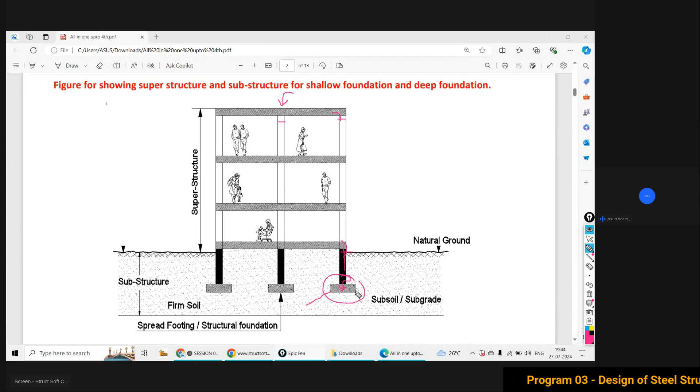This is what we call our foundation, which is responsible for taking the load from the superstructure. But my dear friend, try to understand, this foundation is not actually responsible for carrying the load. It is responsible for transferring the load coming from the superstructure to the subsoil, over which your foundation is going to rest. So overall, your entire structure is not supported by your foundation. Your entire structure is actually supported by your subsoil.

But in our understanding, when we talk about the substructure we consider only the foundation. No, your foundation, the concrete slab that you put here, is ultimately supported by your subsoil. So your foundation and your subsoil are combinedly termed the substructure, the structure which is below the ground. Whatever structure you talk about, whether a bridge, a building, or any other type, it has two parts, superstructure and substructure. And the substructure is not only the foundation, but also includes the subsoil over which your entire structure rests.

Are you getting it? Your foundation slab is just a platform for the superstructure, and the load carried by your foundation is transferred to the subsoil. So ultimately your subsoil should be strong enough for whatever load you apply over it. Your foundation should not be enough alone; your subsoil must also have enough strength to carry the load you put over it through the foundation. So this soil mass should be stiff and firm enough to carry the load coming from the superstructure. But my dear friend, it is not as easy as we are discussing.

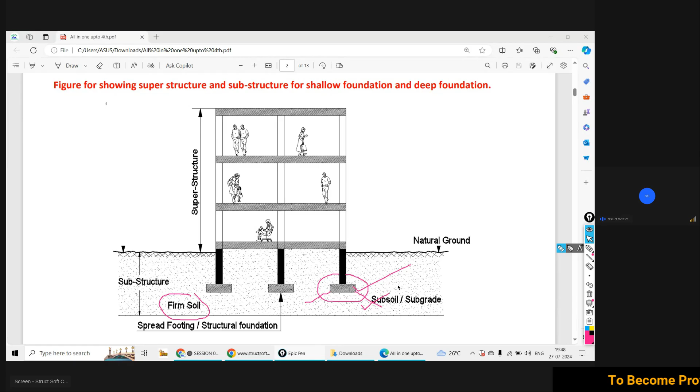It is not that easy, as we are discussing, because there are a lot of challenges associated with finding out the properties of the soil. If you are going to put your entire structure over the soil, you should know its properties - the shear strength capacity, the load carrying capacity. Unless you know the capacity and strength of the soil over which you are going to put your structure, there is a possibility of complete collapse and failure if your soil is not capable of carrying the load you impose.

That's why it is important to investigate a soil, to investigate your proposed land over which you are planning to put your structure. But again, I'm repeating, it is not that easy a task to do the investigation for the soil mass.

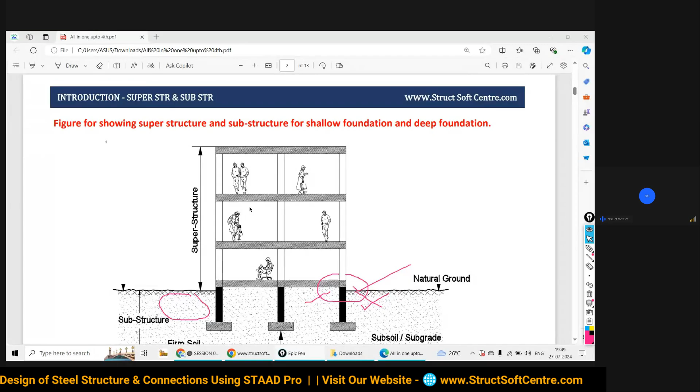Why? Because in a modern era, there are a lot of advancements in respect of architectural consideration. If you talk about the superstructure, there are a lot of iconic designs, a lot of complications, a lot of new inventions, a lot of changes in respect of architectural consideration, superstructure construction, superstructure design. So a lot of advancements are there, and that is possible to achieve.

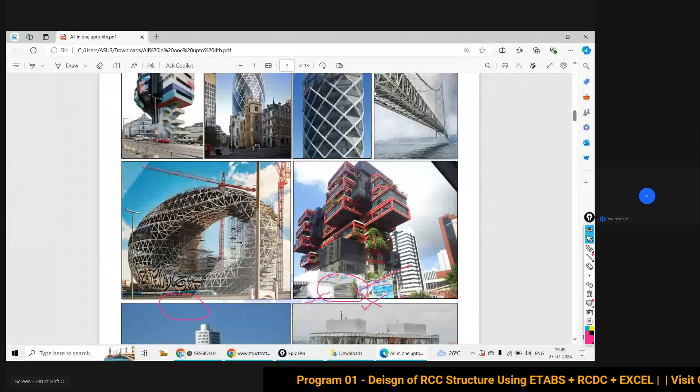That is possible to achieve if an architect has given this kind of structures, this kind of projects. Why? Because for the superstructure, what materials will be there - either the material of concrete, or the material of steel. RCC will be there, steel elements will be there. So tell me, are all these natural elements or man-made materials? It will be man-made.

So for the case of the superstructure, whatever challenges are there, that is possible to tackle. Whatever the proposed plan is, that is possible to execute in respect of construction, strength, element geometry - all of that is possible to achieve. Especially the strength is possible to achieve. If you want very high strength steel material, that is possible to get in the laboratory, in the factory, and as per testing and inspection, you can get the required strength of the steel.

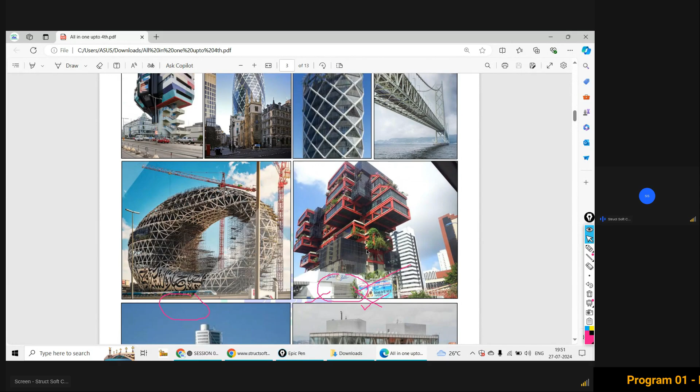If you would like high strength concrete, concrete grades, that is also possible to get. So up to a certain extent, whatever challenges come, whatever new advancements come in respect of the superstructure, that is possible to achieve, to get, to execute. But when you come to talk about the substructure - and as I told you, substructure is not only your foundation.

Break this myth. Substructure is actually the combination of your foundation and subsoil. Of these two, the main part is your subsoil. Even between these two, your foundation is not that important - your subsoil is the main concern. If your soil fails to bear the load, your entire structure is going to collapse.

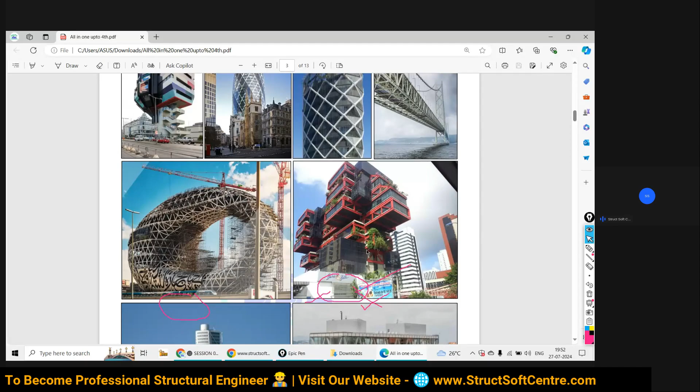And my dear friend, the main thing is that the subsoil is actually a natural element, not a man-made element. Remember this point. And there is a very limited scope - note this point - a very limited scope to get the required strength of your subsoil. You don't have different options to strengthen the soil in respect of cost consideration, or in respect of surety that even after strengthening, it will perform as per our expectation. So there is a very limited scope to get the desired strength of the soil.

For the desired architectural consideration, for the desired new advancement, for the desired new design concepts and requirements, you will not be able to get the required strength of the soil. That is the limitation with your soil mass. Because it is not a man-made material, it is actually a natural element. And with this natural element, we have a limited scope of manipulation, a limited scope of strengthening it, a limited scope of increasing its strength for the purpose of carrying the imposed load. Is that all clear? Yes or no?

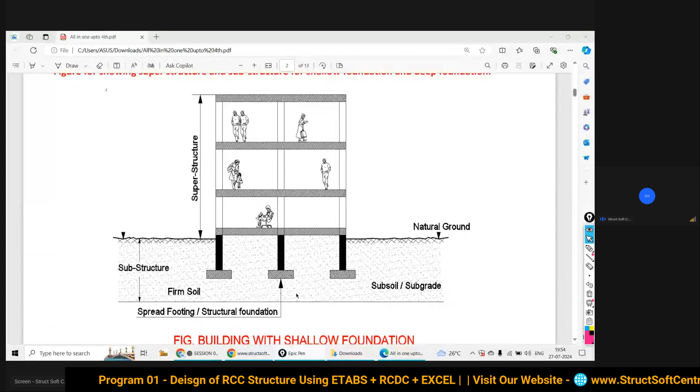Okay, so the thing is, superstructure and substructure. In substructure we have the foundation and the subsoil. In comparison of foundation and subsoil, the major role is going to be played by the soil. And soil is not a man-made material, it is a natural material. With this natural material we have a lot of challenges, because we don't have the option to get the required strength. Whatever strength is available on site, we have to play with that, we have to go with that.

If you are planning to increase it, it is a very limited scope. You cannot make any change. When you are talking about the superstructure, suppose a column is failing, suppose a beam is failing, suppose any element is failing, what will you do? You will increase the reinforcement, you will increase the size of the column, you will increase the grade of steel, you will increase the grade of concrete. But my dear friend, when you are not getting the required strength from the soil, then there's no scope. That is the first problem, as soil is a natural element.

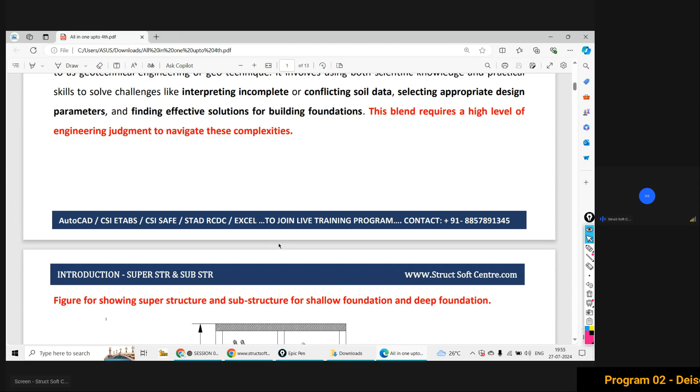Now the second problem. Knowing the properties of the existing soil mass is another challenging job, in the field of structural design, or in the field of geotechnical engineering, or in the field of soil investigation. There are a lot of challenges associated with examining the existing land, for knowing the properties of the soil, the strength of the soil, and the capacity of the soil. What are those challenges? Let's try to understand.

Actually, soil exhibits complex behavior and challenges in engineering, as discussed below. What are the points? Try to understand. Natural soils lack a linear stress-strain relationship, but they exhibit diverse properties. What does it mean? In reality, your soil mass does not follow Hooke's law. What is Hooke's law?

Whatever load you apply over the soil mass, in respect of the increase in the load intensity, accordingly the stresses, the displacement, or the settlement in the soil mass should happen in proportion. Whatever load you apply, accordingly the displacement or settlement in the soil mass should occur. But in reality, it is not the case.

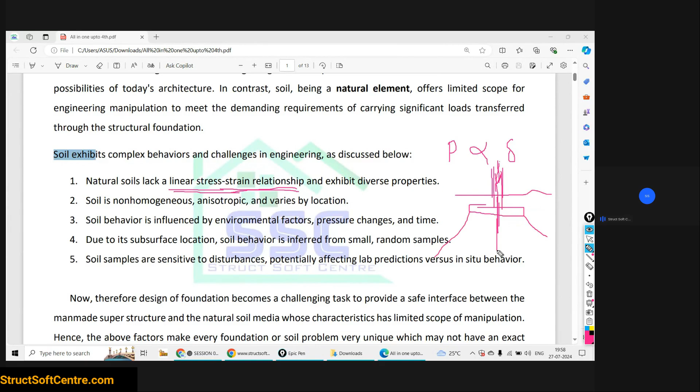Suppose you are talking about a foundation. Suppose this is my foundation, this is my column. Through the column the load comes to the foundation, and the foundation imposes the load on the subsoil. So in the soil there should be a continuous settlement in respect of the increase in the load. If this kind of behavior is there, it is called a linear relationship between the load and the displacement or settlement, and it follows Hooke's law. But in reality your soil does not have a linear stress-strain relationship, and it exhibits a diverse property.

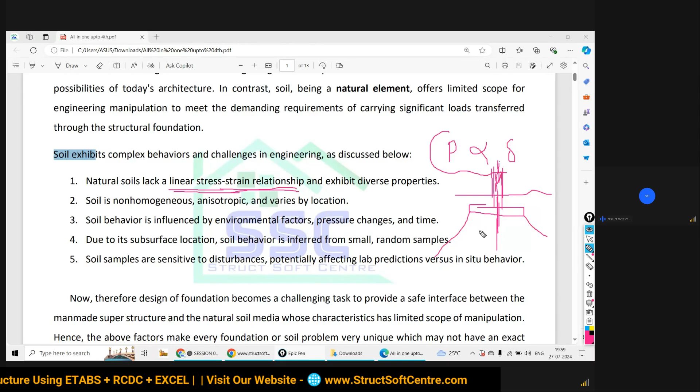Means there will be no linear displacement. There may be sudden displacement, or even by increasing the load there will be no displacement. So linearity will not be there; randomness in the response of the soil mass will be there. First thing, this is the one challenge.

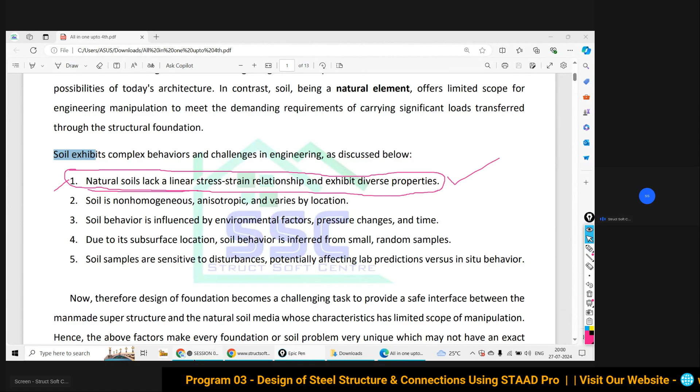So what we are doing, we are making it an assumption, because if you are going to consider this in reality, your research or your examination will become very, very complicated. If you consider this in reality, then your study is going to become very challenging and very complicated. That's why even the scientists, while doing their study, consider that soil has a linear stress-strain relationship. Understood? Yes or no? First point.

Okay, now the second challenge is what: soil is non-homogeneous, anisotropic, and its properties and strength vary by location. It means everything is going to vary with respect to location. I will explain it, try to understand. Actually, soil is non-homogeneous and anisotropic. Means, if you apply stresses over the soil, every soil mass is made up of different particles, and each particle will have unique properties.

The layers will be of different particles, so every particle will have its own property. It has its own stiffness, its own shear capacity, its own bearing capacity, every particle. So how can we say that soil is homogeneous? If I consider one-by-one area of the soil, you cannot ensure that the property of the soil at every point will be the same. No, because soil is not homogeneous, it is anisotropic, and it varies by location.

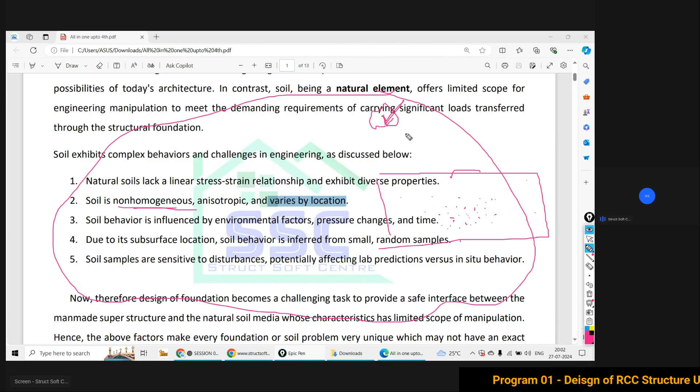As I told you, if you consider a very big area that needs to be investigated, and you want to build a structure over this land which has a very large area, will you ensure that if you do the investigation at this point, if you take a pit and do the test for finding out the bearing capacity of the soil, the settlement, the shear capacity, whatever you are going to do, either on-site testing or laboratory testing, for this portion, and this, and this, and this, can you ensure that the property will exactly match for all these 4 points? No, it is not possible to get the same property, same strength for all these 4 points.

So with respect to location, the properties of the soil are going to be changing. At every point, the properties of the soil are going to be changing. So it is again one challenge in reality: at how many points are you going to do the investigation: 1, 2, 3, 4, 5, 6, 10, 20, 30, 50? Moreover, if a very large area is there, n number of points you need to investigate, at every 1 meter interval you need to perform. That is not practically possible.

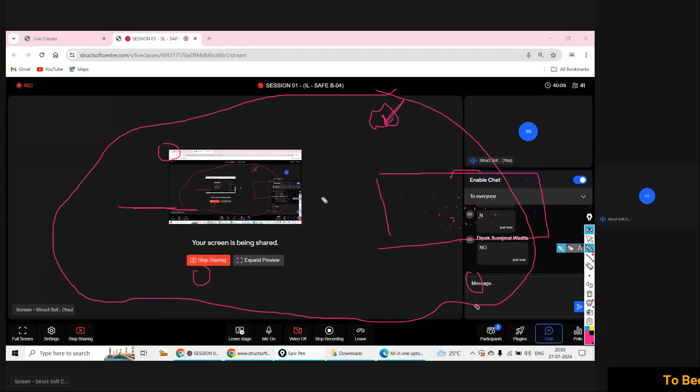Are you getting my point? If I give you a very large area, try to understand at how many points you are going to do the investigation, either 1, 5, 10, 20. But as I told you, even if you do the testing at this point, nearly at 20 meters or 30 meters, if you again do the testing, there is a chance that you will get different properties; the capacity may change.

So that is what the property and strength of the soil mass is going to be varying over the area. It is going to be varying by the location. So this is the second challenge that we need to consider in our investigation. We need to take some factor of safety against this condition.

आपको इसका फैक्टर ऑफ सेफ्टी आपको लेना पड़ेगा. Your soil is actually non-linear, and in your analysis, in your testing, in your investigation you are going to consider it linear. तो जो रियलिटी है आप उसको इग्नोर कर रहे हो टू मेक योर स्टडी एज इजी. सो यू हैव टू टेक द फैक्टर ऑफ सेफ्टी. इसके लिए आपको कुछ सेफ्टी कंसिडर करना पड़ेगा, बिकॉज रियलिटी यू आर गोइंग टू स्किप.

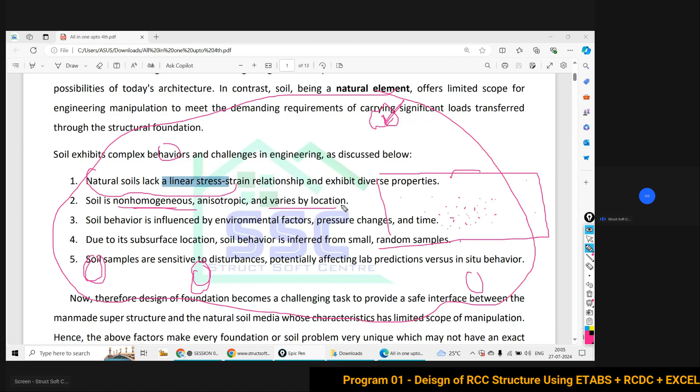And if suppose you are going to consider the reality, it is very difficult to do the investigation, it is very difficult to do the study. आपको स्टडी करना डिफिकल्ट हो जाएगा. फर्स्ट. सेकंड, सॉइल इज नॉन-होमोजेनस. अगेन योर सॉइल इज नॉट होमोजेनस एंड इट्स प्रॉपर्टीज आर गोइंग टू बी वेरिंग बाय द लोकेशन. अब इसको भी आप इग्नोर कर रहे हो, देन यू हैव टू टेक द सेफ्टी फैक्टर ऑफ सेफ्टी in your final design results. Now soil behavior is influenced by the environmental factor, pressure changes and time.

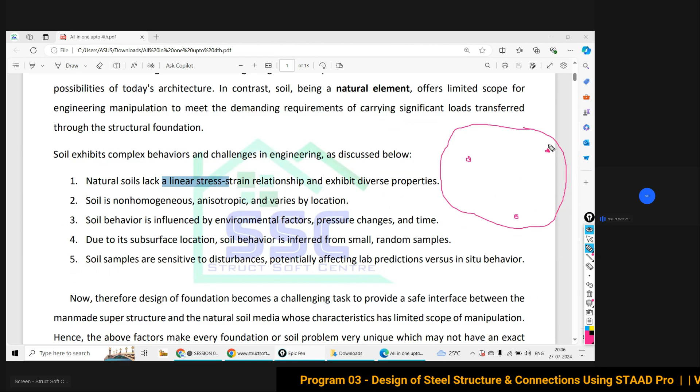Actually again what soil capacity, soil strength is, it varies by surface and subsurface location. As of now we have seen for a very large area the property at this point, property at this point and property at this point will not match. आपके तीनों पॉइंट्स पर प्रॉपर्टी मैच नहीं होने वाला है. Likewise we are going to see over the area. Now if you are going to see for the same land, suppose this is your ground level.

Now if I am going to do the testing at a depth of 1.5 meter, then at that same location at 3 meter, now again at 5 meter, now again at 10 meter. Tell me, the properties at each different depth, will they be the same, its plasticity, its bearing capacity, its settlement, its moisture content, its water level? Will it be the same? No, it is not going to be the same. It is going to be varying.

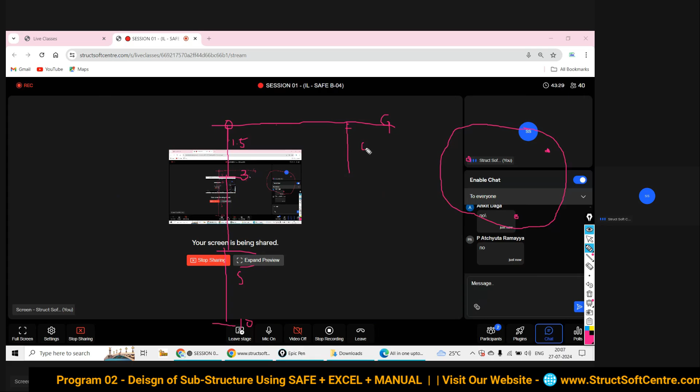So in reality, to what depth can you do the exploration? Reality में आप कितनी डेप्थ तक परफॉर्म करेंगे? If I'm asking to do the testing at every meter of interval, at every 0.5 meter of interval, it will be possible to do, and to a depth of 100 meter it will be possible to do. If you would like to have the actual response, तो आपको इतना करना पड़ेगा, but in reality, in practical consideration, it is not possible. It is not possible. We should consider this, but practically it is not possible. Then again you have to take some factor of safety against your lack to consider the reality.

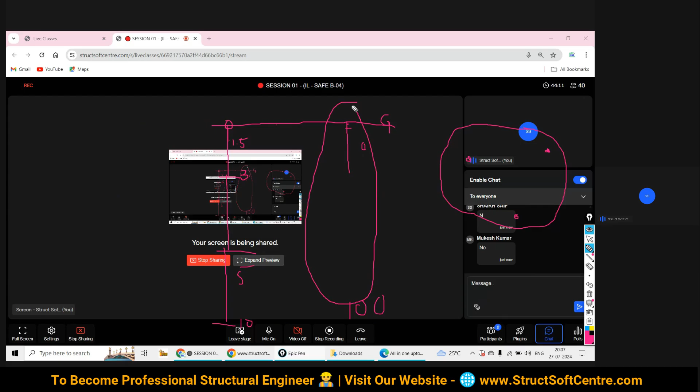आप रियलिटी को कहीं ना कहीं इग्नोर कर रहे हो, तो उसके लिए आपको क्या लेना पड़ेगा? यस और नो? यस, टेल मी व्हाट reality. We are going to compromise with the reality, we are going to compromise with the actual thing. In that situation, what we need to do? Yes, we need to take a factor of safety, right? So this is the third challenge associated with the soil exploration.

Due to its subsurface location, okay, environmental factor. What is the environmental factor? Try to understand. Like the soil in rainy season, the soil property may change, soil nature is going to change. In summer season it is going to change. In the winter season it is going to change. So in every season, in every environment condition, the properties are going to change over time.

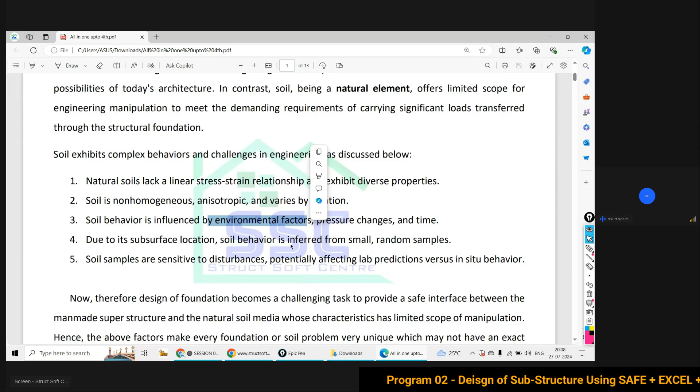And due to its subsurface location, soil behavior is inferred from small random samples. Okay, due to its subsurface location, soil behavior is inferred from small random samples. Okay, random samples. Try to understand. Actually, take this fifth point also together. Soil samples are sensitive to disturbance, potentially affecting lab predictions versus in situ behavior.

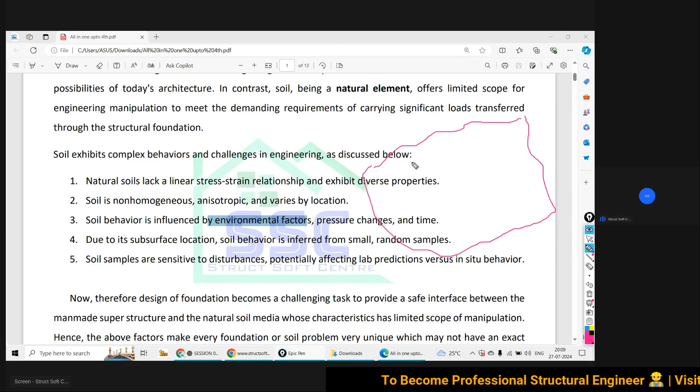See, actually the thing is, suppose you are going to consider a big area, and you are going to take a sample from one point, and then you are going to do the investigation at this point. So you have two options. One option is that either you can do the exploration on site, or you can do the exploration in the laboratory. Two options you have.

One option is to do the exploration on site, there are different methods we will see. On site you can do the testing and come to a conclusion about the property of the soil. The second option is that you can take the sample from the site to the laboratory, perform the testing there, and through that testing you will come to know the property of the soil. So either you can perform it on site, or in the laboratory.

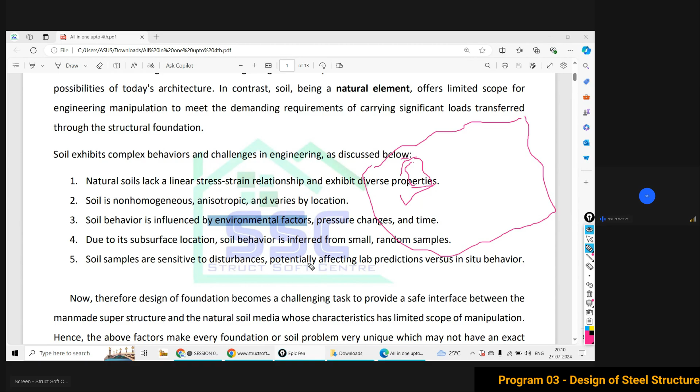But my dear friend, can you ensure that the testing done in the laboratory and on site will be the same? Yes or no? Will it be the same? No, it is not going to be the same. It is going to vary.

In reality it will vary, but actually the soil is the same. Reality is that there is one soil on which I'm going to perform the testing on site, and for the same soil, the same depth, the same location, the same land, I'm going to perform the testing in the laboratory. So in reality it should be the same, it is actually 100% the same.

But if I do the testing in the laboratory and I do the testing on site, then definitely you are going to get a different result. Why is it? Try to understand. It is because your soil mass is very, very sensitive to disturbances.

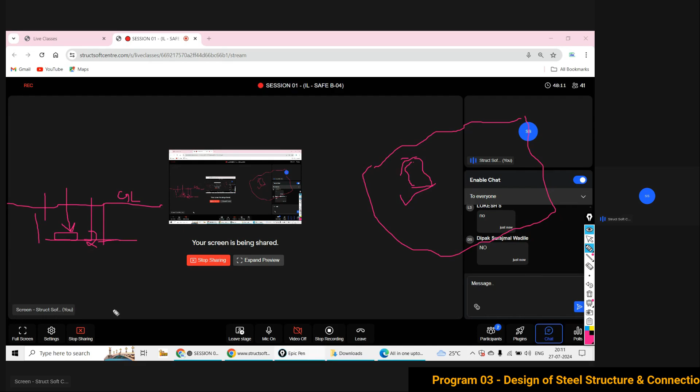Hello. See, consider a depth of 2 meters, suppose I dig a pit and take a sample from this point, which is at a depth of 2 meters from the ground level. From the ground level, this is where we have to put the foundation, and we are going to do the testing at this level, at a depth of 2 meters. One time I do the testing at this 2 meter depth on site, and the second time I take out a small sample of the soil mass and carry it to the laboratory. So what is the problem?

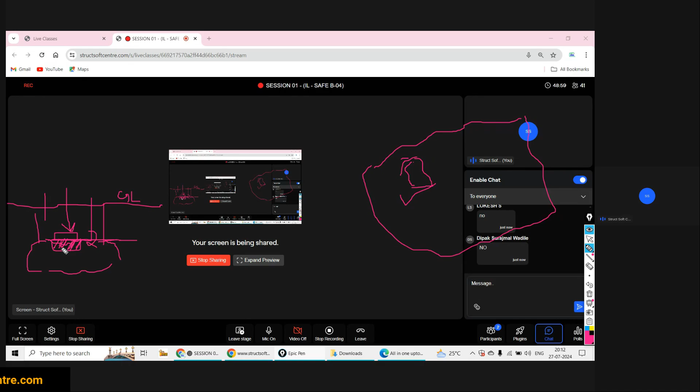In the first case, your soil is in compact form, with stiffness. This is the soil over which we are going to perform. It is having stiffness support from the surroundings. It is in compact form. So at this point it shows a little more stiffness, more bearing capacity. But while taking out the sample, there is a possibility of crack formation in the soil mass. There may be disturbances, breaking of the parts of the soil, like the particles of the soil, and due to that it is going to lose its actual stiffness, its actual property.

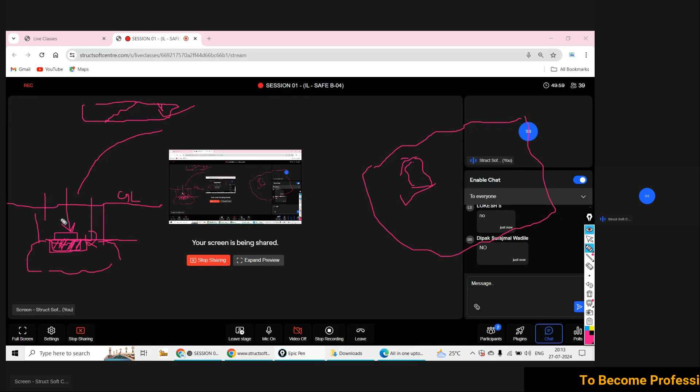That is the first thing that happens. And whatever the moisture content is on site, while carrying it to the laboratory the moisture content of the soil mass is going to be lost from its actual site moisture content. Due to that reason, there will be a difference between the laboratory testing results and the on-site testing results. Do you understand this, agree with this, yes or no?

Okay, so here again we need to consider some factor of safety against this reality. Just a minute.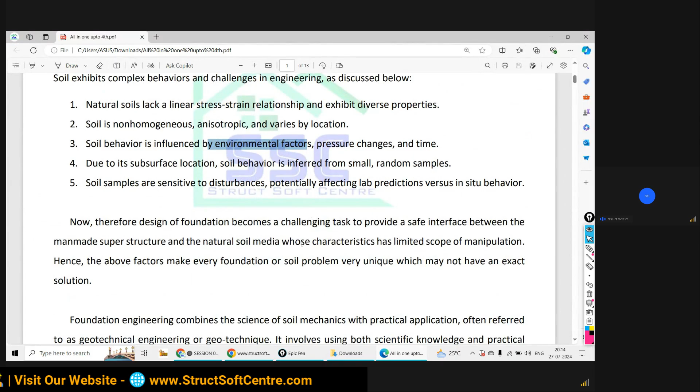So these are some of the challenges in finding the actual capacity of your soil mass. Second, the soil has limited scope for manipulation. You cannot increase the capacity of the soil on the proposed land. Foundation engineering combines soil mechanics with practical application, often referred to as geotechnical engineering or

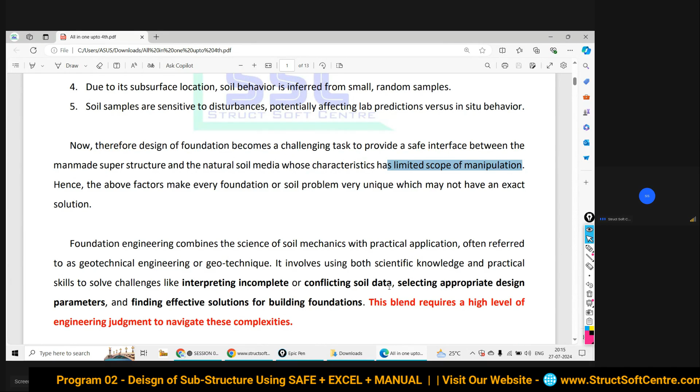geotechnique. It involves using both scientific knowledge and practical skills to solve challenges like interpreting incomplete or conflicting soil data. If you would like to investigate the soil, the person doing the investigation should have proper experience and knowledge to correct the conflicting data of the soil. Because for one project, for one site, a single point will not be enough to predict the actual capacity of the soil. So we need to choose the right positioning of the investigation, deciding which point will be important to investigate.

Then, what type of foundation will be suitable in respect of your design, your soil capacity, and the existing properties of the soil? All these things require a very experienced person with good judgment in solving complex problems. So that's why, my dear friends, as soil is a natural element, we need to take a higher factor of safety over

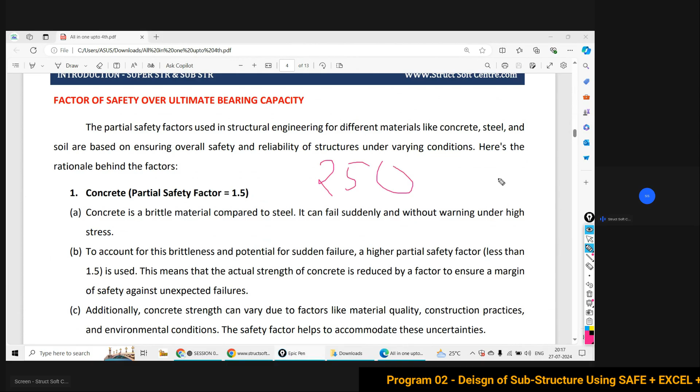its ultimate bearing capacity. When you see a soil investigation report, the bearing capacity they suggest is, for example, 250, 300 or 200 kilonewton per meter square. But in reality, after doing the exploration and testing, they actually get a bearing capacity of 900, 800 and 700. But in the report they suggest considering 250, 300, 200. Why? They have applied the factor of safety, and as per the recommendation, the factor of safety for soil mass should be between 2 and 3. Normally we consider it as 3, because it is a natural element.

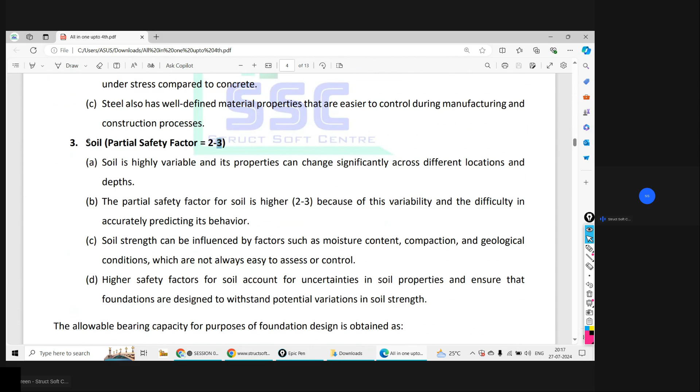If you talk about concrete, as we have seen earlier, concrete is a man-made material. Whatever strength we expect, approximately 90 to 95% of the same strength we achieve on site. That's why the factor of safety is taken as 1.5. What does factor of safety mean? It relates to the capacity of the material to carry the load. Suppose, for concrete, in reality the concrete has the capacity to carry a load of 100 kilonewton per meter square. I will not consider it as 100. I will consider 100 divided by 1.5. Whatever value comes out, I will use that strength in calculation and design. So we are reducing it.

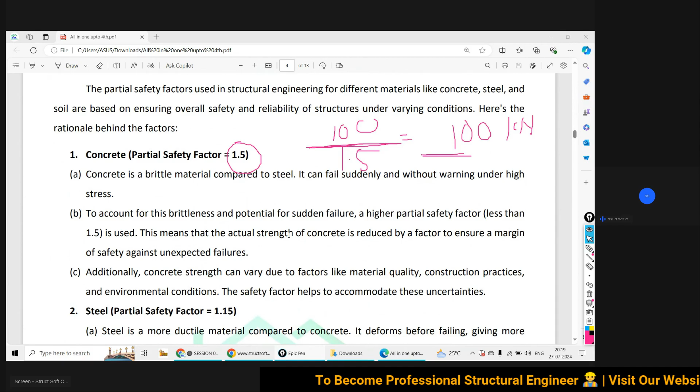Likewise for steel. Concrete is prepared and cast on site. That's why there are more chances, in comparison with steel, of not getting the expected result. That's why we take the partial safety factor as 1.5. But steel is made in a factory. It is not built on site. It comes from the factory, so with proper inspection, proper testing and machinery, it is produced.

If you talk about concrete, manpower works to make it. In a very big project, machinery works there. But for a smaller structure, not much machinery is used to execute the work. Manpower does the work. So every time we will not get the same proper mixing, proper placing and proper vibration of the concrete. So obviously we will not get the expected strength. That's why we take the factor of safety more.

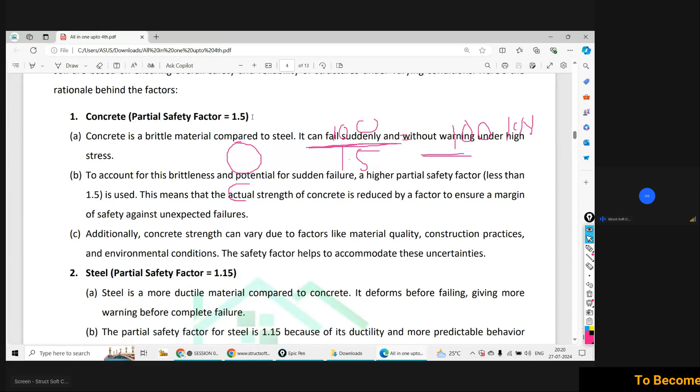But when you talk about steel, steel is coming from the factory, so less partial safety factors will be enough because there is less chance of reducing the strength. Now when you come to talk about soil, as we have discussed, due to that reason it is recommended to take the factor of safety as 3, or we can say 2 to 3. Is that all clear?

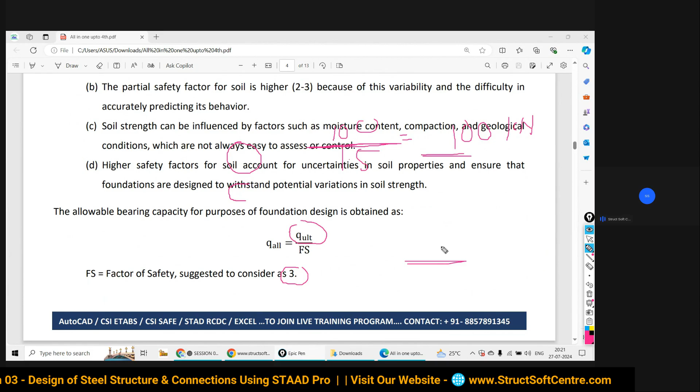So whatever the ultimate load, ultimate capacity we are getting, over that ultimate capacity the factor of safety is suggested to consider as 3. So in your soil investigation report, whatever bearing capacity of the soil you are getting, that will not be the exact one which the geotechnical engineer actually gets on site. It is given after applying the factor of safety. Remember this point, it will be important when we come to the design stage, when we decide the size of the foundation. I will again take this point. Is that all clear?

Okay, now good. So partial safety factor is now over.

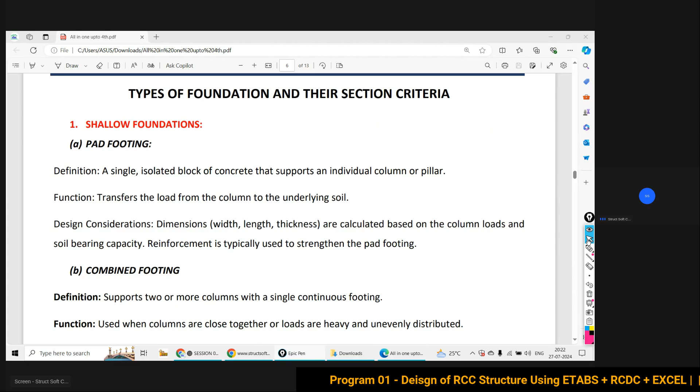So my dear friend, now the next point is to discuss the types of foundations. What are the different types of foundations? Basically foundations are divided into two major categories: shallow foundation and deep foundation.

Very simple. If the depth of the foundation is more than the width of the footing, at that time we are going to consider it as deep foundation. And when the depth of the foundation is less than the width of the foundation, at that time we are going to call it shallow foundation. So two types of foundations are there: shallow foundation and deep foundation.

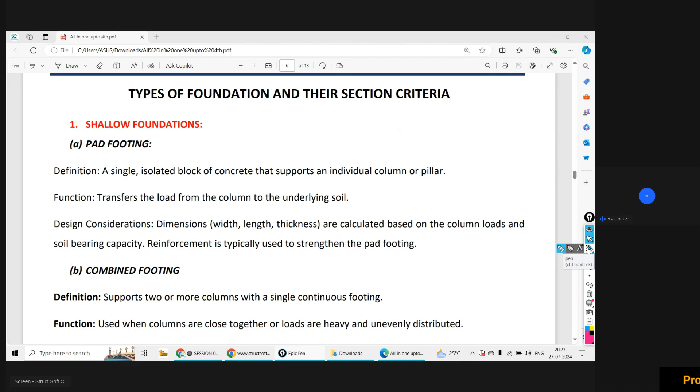Now actually in shallow foundation there are different types. What are those types of foundations in shallow foundation? Shallow foundation: simple pad footing is there, stepped footing is there, sloped footing is there, combined foundation is there, strip foundation is there, strap foundation is there, and mat or we can say raft foundation is there. So all these types of foundations are actually shallow foundations.

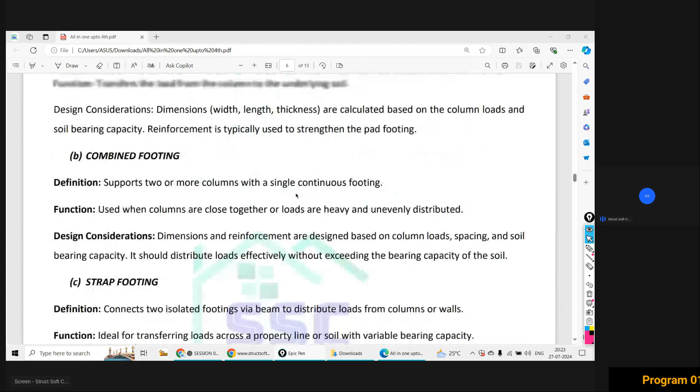Meaning the foundations are going to be present close to your ground level. The foundation which is present close to the ground level, that we are going to call shallow foundation. In simple terms, if you see here, your foundation is close to your ground level, that's why we are calling it shallow foundation.

Now why is it going to be provided close to the surface, close to the ground level? Because as we have just discussed, we are going to put our entire structure over the soil. So if you are getting the desired property, desired strength, desired stiffness, desired load carrying capacity of the soil near the ground surface, then what's the problem? I can put my foundation there.

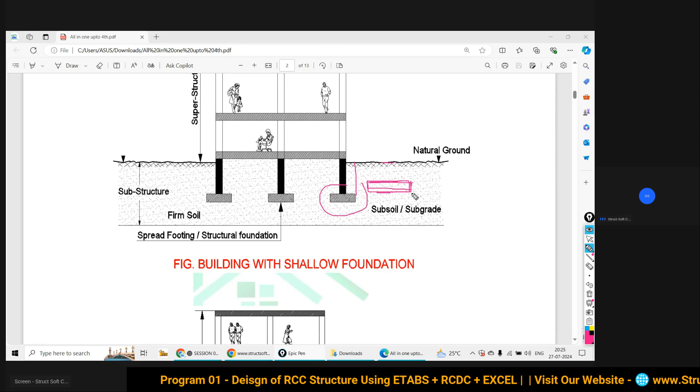If you are getting your desired capacity near the ground surface, that's a good thing. So I will put my foundation there and take my superstructure load to that particular foundation. And as the soil is stiff enough, having strength enough to carry the load, what's the problem? And if that situation is there, where you are getting desired strength, desired capacity of the soil near the ground surface, that foundation is called shallow foundation.

Obviously you are going to do the investigation, and after the investigation you find the capacity near the ground is enough required for your project, for your load, for your structure. So what will you do? You will put your foundation there. So that foundation is called shallow foundation. So all the types of foundation present here are types of shallow foundation.

Now you may raise a question: sir, if it is shallow foundation, why are there different types of foundations? Actually one foundation should be enough. So due to different conditions, due to different situations. And what are those situations?

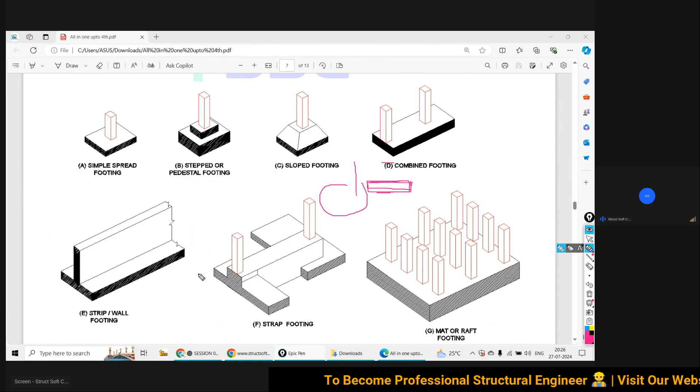Actually the load and response in your soil mass. Again, I am repeating, due to the load intensity and the property of the soil on the proposed land.

Okay, near the ground level, it is having the required strength, adequate strength is there, no doubt. A shallow foundation will be there, but there are some situations that are going to arise. In that situation, or to comply with that situation, we need to provide different types of foundation.

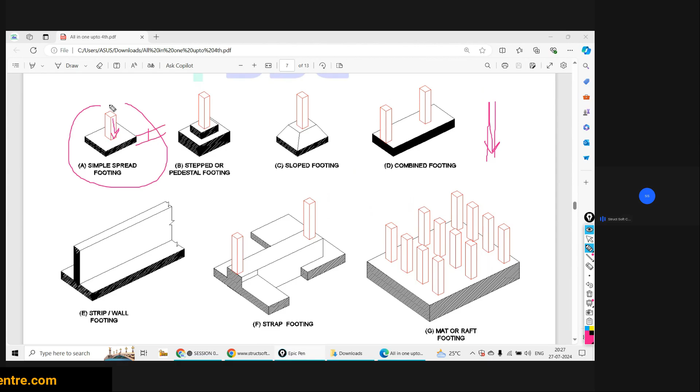For example, if suppose everything is normal, means the bearing capacity of the soil near the ground surface is adequate, plus whatever the anticipated load is coming through the column is also adequate. So when everything is adequate, a simple pad footing will be enough. One column is carrying some adequate load, and adequate capacity is available near the ground level, so I will provide the simple pad foundation.

But my dear friend, in a situation when the bearing capacity of the soil near the ground is adequate, but the load coming from the superstructure or through the column is very, very high, in that situation pad footing is okay, but the demand of the depth is very large. So what is the limit when you will say that the depth of the foundation is large and not good for a simple pad foundation? I will discuss that. And in what condition this depth demand will be more, that I will discuss later.

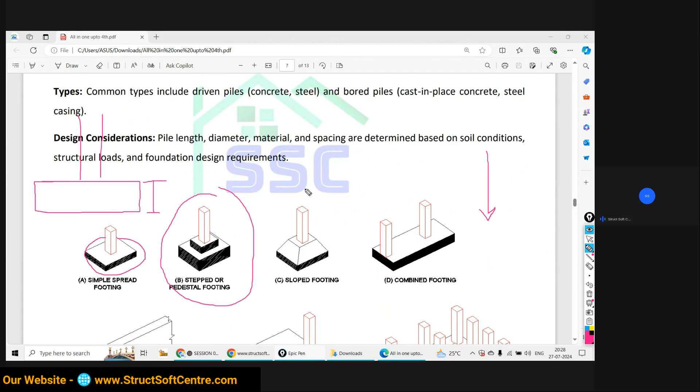So in that situation, we are going to suggest stepped footing. When your load is high and the depth requirement is high, in that situation, to save the concrete, to save the cost, to make it economical, we have two options. Either we can go with the stepped footing, or we can go with the sloped footing. I will discuss these two in detail later on, when we do the calculation for the project. So I'm going to stop the discussion here.

Now the third thing: in which situation will the combined foundation be required? Suppose the load carried by one column is adequate, the load coming from another column is adequate, and the capacity near the ground surface is also adequate. But unfortunately, when you decide the size of the footing, this is my one column, the size is coming like this, and for the other column the size of the footing demand is like this. So they are going to overlap by some distance.

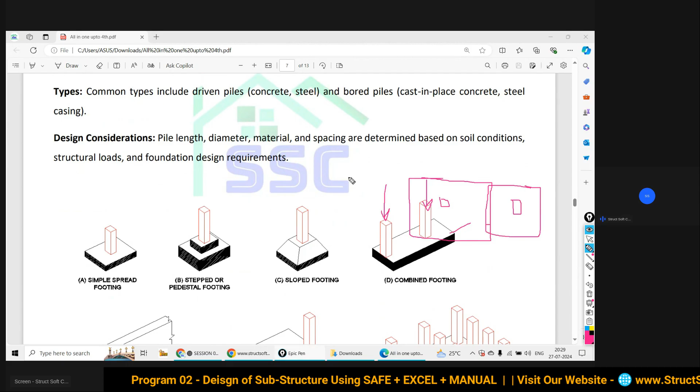The load is okay, the bearing capacity is also okay, but unfortunately the areas of footing required to carry the loads coming from the columns are going to overlap. So in this situation, we need to combine the foundation. We combine those two areas to avoid that merging, and we have one footing which is going to carry two, or it may be more columns, by one foundation. So we are going to call it a combined foundation.

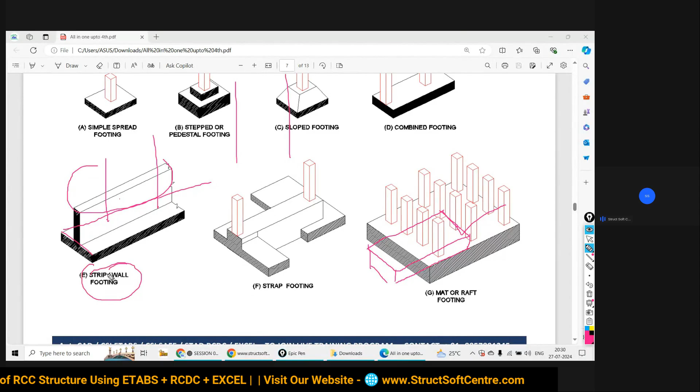Now, if suppose a wall is there, for load-bearing structures, you are going to provide a continuous footing for that. If a number of columns are there in one row, that also you can call a strip footing, or wall footing. For a wall, if you put a footing, that becomes a wall footing for a long span with a limiting width. So that is called a wall footing.

And if a number of columns are there in one row, not two, not three, but five, six, seven columns in a line, that is going to be converted into a strip footing.

One foundation will be there to carry the load coming from all of the columns. And now the next term, very important, which people are actually more conscious to know the answer. Suppose your column is coming on the property line. Suppose I am going to consider this land, this is my proposed land. Here the column is there, here the column, here the column, here the column.

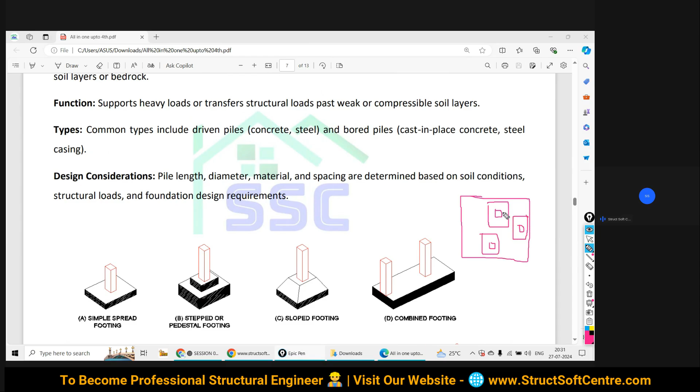For this there is no problem, I can put my footing like this, like this, like this, because it is in my area, it is in my property. But the next block is not my property. But the column I am going to propose here, as per the structural design requirement, I am going to put one column here. So can I take the footing like this? Yes or no? No, I cannot put the footing like this.

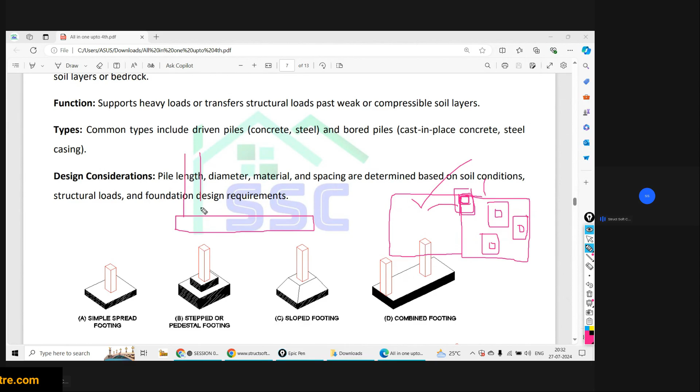Why? Because this side is not mine, that area is not mine. So in that situation, we need to provide the eccentric footing. If this is my foundation and I am going to put my column here, this part of the soil is going to become very heavily stressed, while this portion of the soil is not stressed that much in comparison to the left part. Due to which unequal pressure distribution will be there, unequal settlement will be there, and a lot of challenges. So in that situation, to normalize the load transfer from one common center point, in order to avoid this eccentricity, we are combining this footing with an adjacent column foundation.

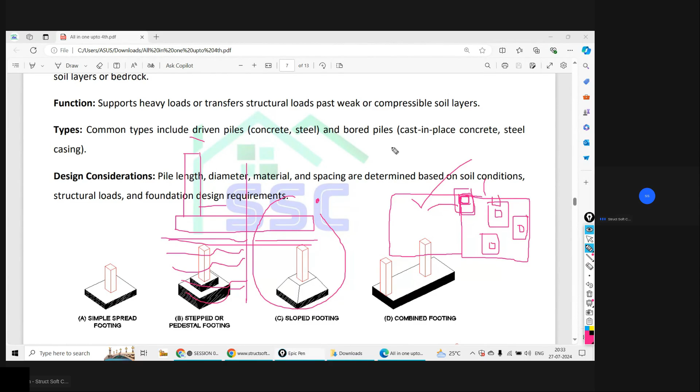We are going to combine it with a beam, and that type of foundation is going to be called a strap footing. So this eccentricity we are going to control by this line element, that is your beam element, and that beam is going to combine these two footings, right? We'll talk on this later in detail, I'm just giving the introduction.

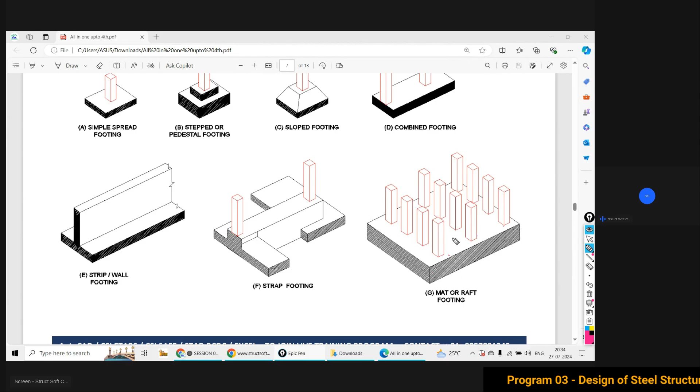Now when you are going to put one footing to carry the load of all the foundations for your proposed area, that is called a mat foundation or raft foundation, where the soil has different properties by location, and there's a chance of unequal settlement, which is mostly formed in clay soil. When you talk about clay soil, if you put individual foundations, this individual foundation is going to experience its own settlement, and so is this one, and this one.

So now every foundation will experience a different settlement, meaning your soil is going to be settled by 5 mm here, here it is going to be settled by 20 mm, here by 15 mm. Unequal settlement leads to instability in your superstructure, and may become a cause of the formation of cracks in your foundation. Settlement will happen in the soil, so there is a possibility of formation of cracks or failure in your foundation, as well as the superstructure elements will also experience crack formation.

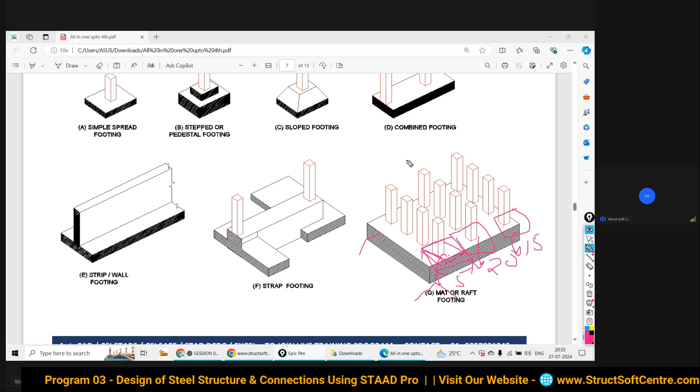It is not that only your foundation will experience damage, your superstructure will also experience failure in respect of cracks, flexural failures, shear failures, all those failures will form in your superstructure too. Are you getting my point? So to avoid the unequal settlement for loose and clay soil, it is having enough strength, but it is the type of clay soil. In that situation, or loose soil, the experts or geotechnical engineers are recommending to consider the raft foundation.

Okay, so these are the different types of foundation and their preference in different situations and conditions. Overall, all of these are shallow foundations which are put near the ground level or near the ground surface, because we are getting the required adequate strength there.

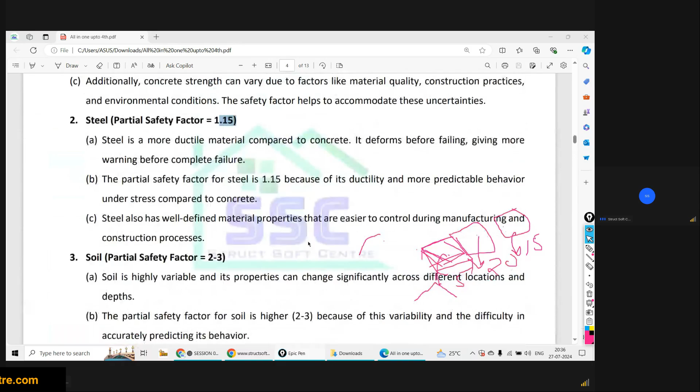But in another case, when you are not getting the desired strength or desired capacity at a desired depth, what we need to do is carry that load to a greater depth, until you get your desired strength layer. That type of foundation is called deep foundation. And the most common type is the pile foundation. Actually a lot of other types of foundations are there, but that is out of our syllabus, so we are limiting our discussion to the pile foundation.

So in this, what happens is that in your deep foundation, we need to transfer that load to a greater depth. Why? Because you are not getting the layer which is enough to carry that load. There are two conditions, try to understand.

In the first case, the load is normal, not much more. Like suppose, it is a small structure I have considered, suppose only two floors are there, but near the ground, very less capacity is there.

So what will happen, we need to transfer that load to a greater depth. We need to take this load to a greater depth. I need to check for the depth of 5 meters, I need to check for 7 meters, I will check for 9 meters. Now I am getting the required depth, required strength at this level. So I will carry that load to this level, and that is not possible with a simple pad foundation or shallow foundation. That is possible through your deep foundation, which is nothing but your pile foundation.

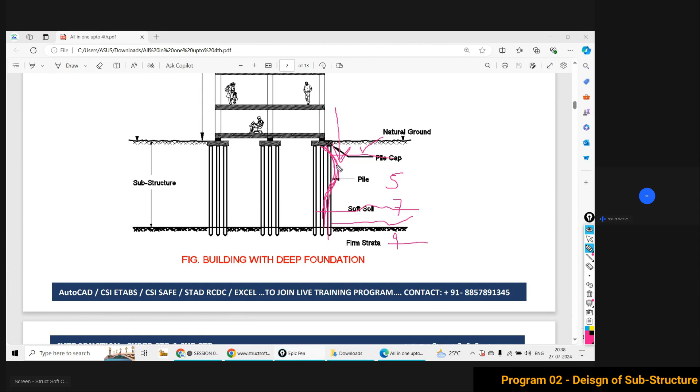First case is when you are not getting the required and desired capacity. But if I tell you that there is a design, and you are getting the required strength, that is good enough for the normal and general case. But still I will look for the deep foundation. I will go for the deep foundation.

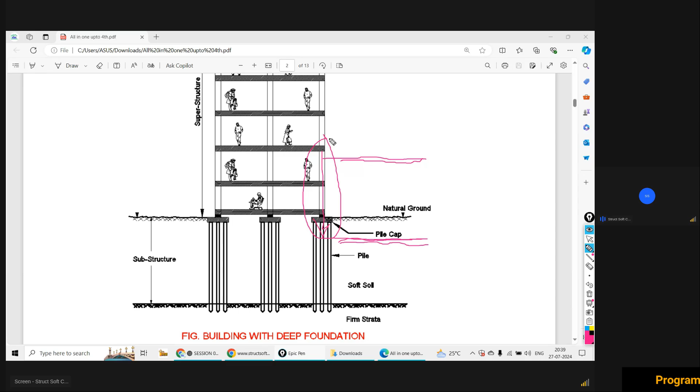Why? In a situation when you are talking about a tall structure, obviously your column will carry very high intensity of load. Actually, the capacity of the soil is adequate, good for normal conditions. But your load is not normal. If your load is very very high, because you are talking about a tall structure like a 30, 50, 60 floor building, that building's column at its base, that building's shear wall at its base, will carry very high intensity of gravitational load especially. So in that situation I need to put that load to a greater depth.

Understood? Yes or no? Okay, right.

Now, the next thing, try to understand. Hope that's clear to all of you. Next thing.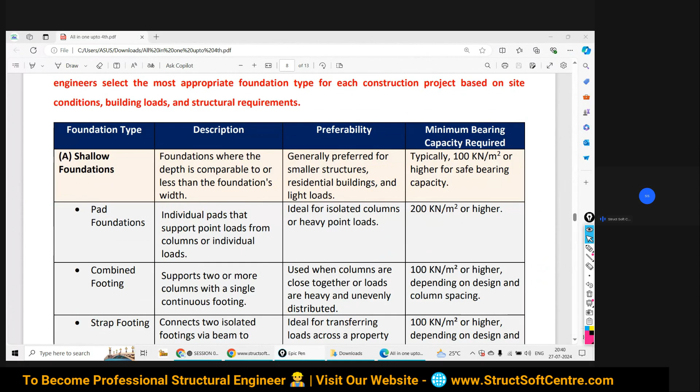So people are actually asking this question many times: sir, on what basis do we have to decide the type of foundation? So I have given this explanation to understand, and I have given all that explanation summary in this table. So when you are going to study, you can refer to all these things, all the discussion that we have done. It is summarized here.

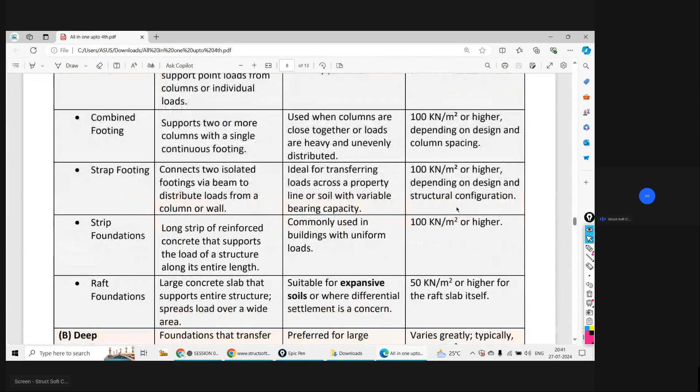One more important thing you will find here is minimum bearing capacity required. So don't take it too seriously. Like people, after looking at this, they will ask, sir, if the bearing capacity is 100, then shallow foundation? No, it is just given for reference. It all depends on your site condition. These minimum bearing capacity values are typically guidelines and can vary based on the specific project requirement. As I told you, the choice of the particular type of foundation, wait for a minute, wait for a minute.

Yes, am I audible? Okay, so what we are talking about?

So I'm telling that this bearing capacity is just for the reference, you can read it out. You can understand, like for the pad foundation, it is the individual pads that support point loads from columns or individual load, for one column, ideal for isolated columns or a heavy point load. Normally the bearing capacity of the soil, if available on site near the ground level, is 200 or higher, so we will go with the simple pad foundation.

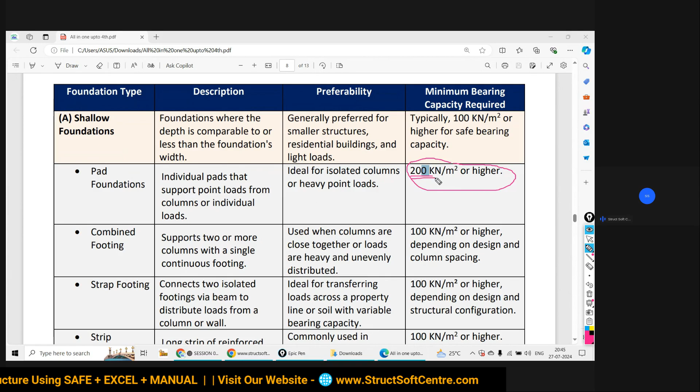But it may vary. Why? Because the type of foundation is not dependent only on one factor. Suppose for the same situation the bearing capacity is 200, but the load coming from the column is suppose 20,000. Will the pad foundation be enough? No, we need to go for the deep foundation, because a very high intensity of load is coming. 20,000 is not a small value in respect of the anticipated load under one column or under one shear wall, right?

So if one factor is the parameter to decide the type of foundation, then okay, but the selection of type of foundation is not dependent on one thing alone, that is bearing capacity of the soil. It is also dependent on the load that is coming, right? So it is actually dependent on two things. That's why we cannot rely only on this, but it is just given for judgment and understanding, so you can read it and understand it.

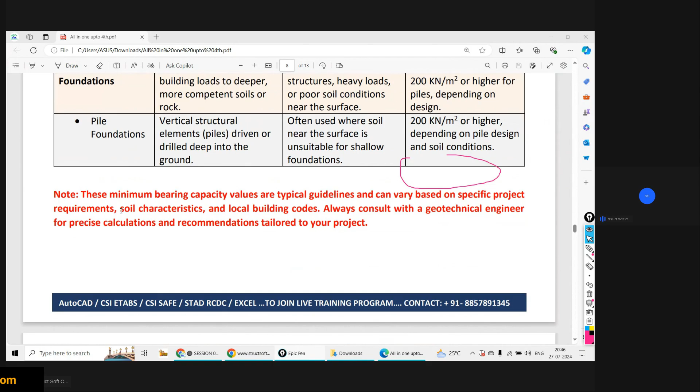But again I'm repeating, these minimum bearing capacity values are typical guidelines and can vary based on specific project requirements. Meaning, as per the project, if it's carrying a very large load, then it will change. Soil characteristics and local building codes - always consult with the geotechnical engineer for precise calculation recommendations tailored to your project. Yes, so it is just a general reference. If you are going to deal with any of your projects, at that time you need to know for your proposed structure.

Now a very common question people are asking: sir, I am living in a small city and there is no scope of doing soil investigation or soil exploration, so what can I do for my project? Am I right? You are also having this kind of question? Yes.

Okay, so it's very simple. Actually, even for most small cities, it's not possible to do soil investigation. Soil investigation is a little bit costlier, so it is not always possible to perform soil investigation for every structure. Actually it should be done, but from the point of facilities, skilled person availability, and cost consideration, it is not possible to do soil investigation for every project.

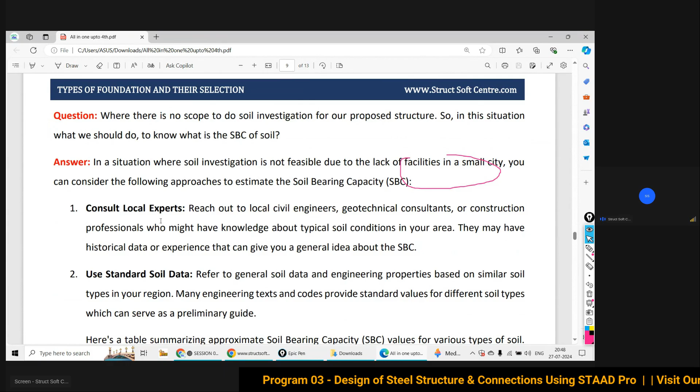So in that situation, what to do? I have given this question for your reference. In that situation you have to consult with the local expert. You have to reach the expert design engineer in your locality, in your area. You have to consult with them, approach the geotechnical engineer or geotechnical consultant in your area.

Now you will say, sir, in my area there is no consultancy doing this work, and no one is going to perform this soil investigation. So you have to find the person who actually has knowledge of this kind of investigation, who has experience working in any city or country. You have to consult with working professionals on site - they will give a judgmental bearing capacity value of the soil for your proposed land. You also have to find out if any investigation has been done in the past in or near your area, and you can take that report as a reference.

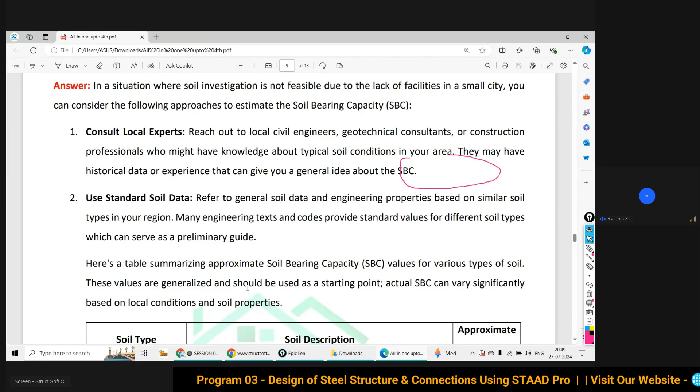In reality, every location will have different properties, but as there is a shortage to perform soil investigation for your land, in that situation, what to do?

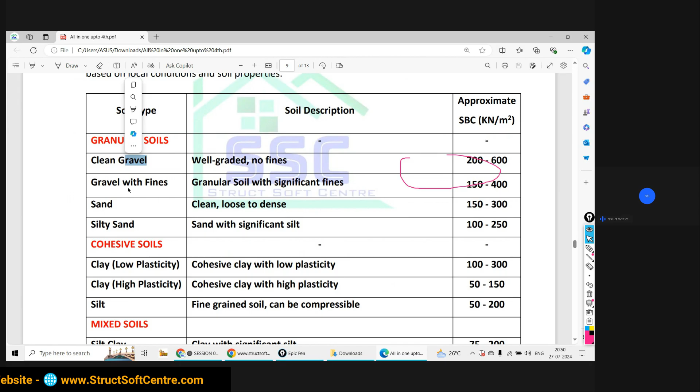For a required depth, you need to find out what is the type of the soil, whether it is clay soil or sandy soil, and based on that, the recommended bearing capacity of the soil. If you are getting gravel, sands, or silty sand, based on that you can consider the bearing capacity of the soil.

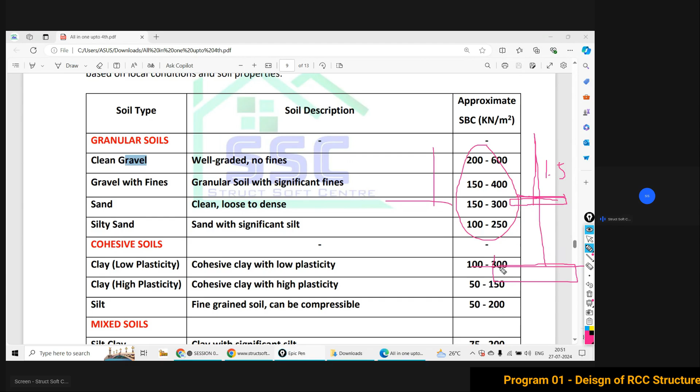What type of soil is it? Suppose sandy soil, with silty on top. Going for 3 meter depth, I am getting sandy soil. Then going further deep, I am getting gravel with fines. And further, at 5 meter, I am getting well graded gravels with no fines and no particles. In that situation I can consider the SBC of the soil as 200 to 600.

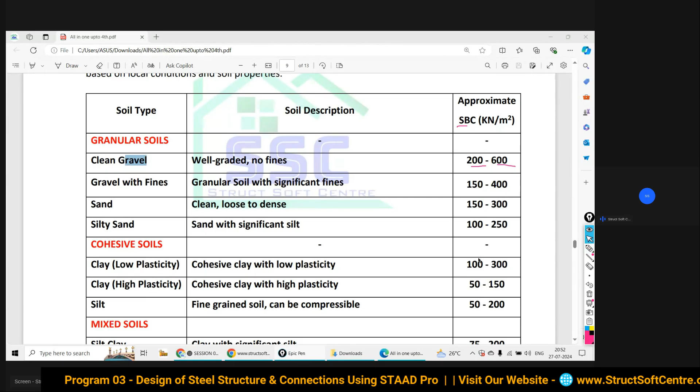So visual inspection you can do on site, and based on the type it may be cohesive soil, or mixed gravel and cohesive soil. There will be rocky soil, weathered rock meaning rock in disintegrated form, in parts, or there may be solid big rocks. Accordingly you can consider the bearing capacity of the soil. Are you getting what I'm trying to explain?

Yes or no? This is the most common question people are asking. So on that basis you can decide.

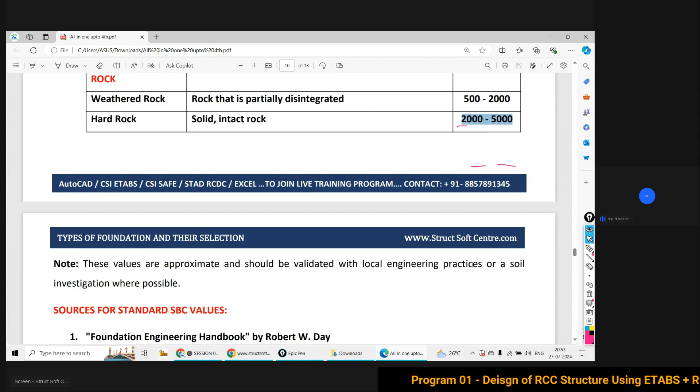Again here I have given a note: these values are approximate and should be validated with your local engineering practices or soil investigation wherever possible. And you have to consult with a geotechnical engineer. After having the type of the soil, you can consult over a call with any geotechnical engineer, and he will help you go for your approximate solution.

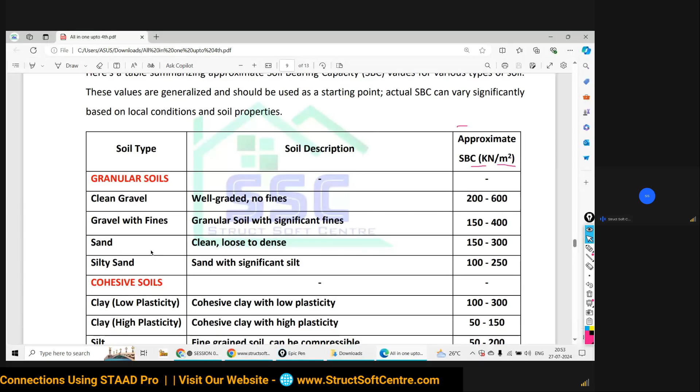Then with that soil, you can send that picture to your geotechnical engineer. By looking at that picture, they can tell you what soil capacity you can consider. Will it be the solution? Yes. So hope that's clear to all of you.

So sources for the standard SBC values, I have also given the sources from where I have taken this reference value, approximate value that you can find from here. Is that all clear?